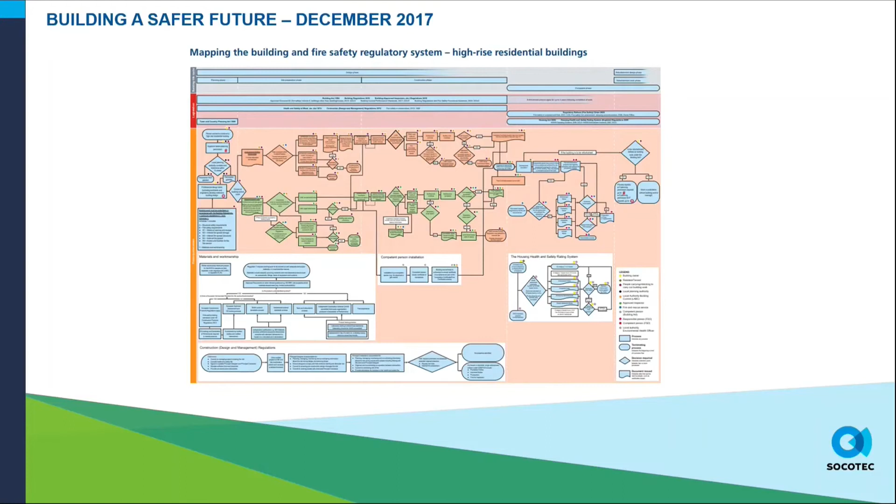And so this actually made it really difficult for buildings to comply and for people within the industry to understand all the aspects of industry and building safety, so that they could build buildings and understand their part in the construction process, and the effect that their work might have on other aspects of compliance for the building.

And so what Dame Judith and her team wanted to try and do was trying to simplify that process. Again, not expecting you to look at this - these are documents that are within the Building a Safer Future report.

But to simplify that process so that you actually went through stages. We've probably all heard about the gateway stages that are being proposed, and this was the plan for the legislation and for the proposals for industry, so that we simplified that process, went through the stages of design and construction and occupation of the building, and people could understand the process and the impact that their part of the works would have on the construction of a building and the safety of a building.

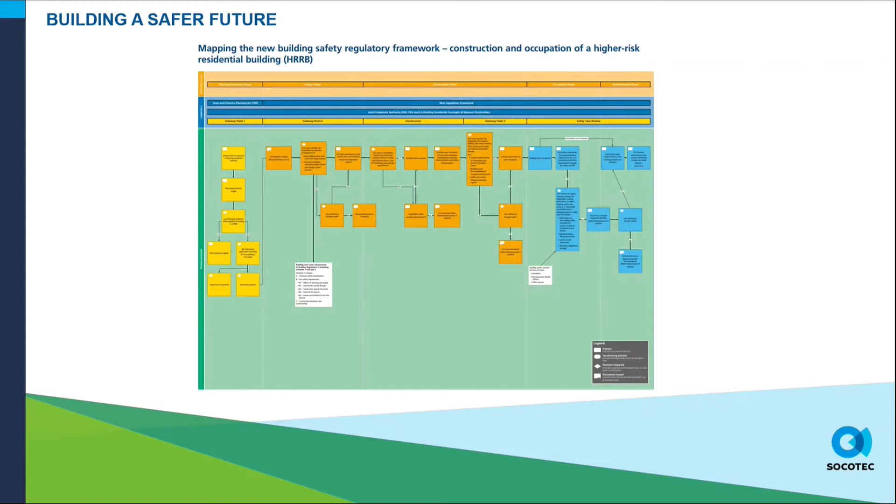And this is also going to look at buildings going into the future in occupation as well, rather than just during the design and construction process. So again, trying to simplify the process.

Within the Building Safety Act, the idea was that there would be a new building safety regulator. The Health and Safety Executive have been asked to become the building safety regulator, and Peter Baker has been appointed as the Chief Inspector of Buildings within the Health and Safety Executive.

With the Building Safety Act receiving royal assent and becoming the Act of 2022, that is now enshrined in legislation, the Building Safety Regulator. Although the Health and Safety Executive had been doing a lot of work in the meantime while the bill was running through Parliament, they were really acting in shadow form. But now the Act has been given royal assent, the Building Safety Regulator has come into being and can progress with their plans for the building safety culture.

At the heart of the reforms, the Building Safety Regulator is going to operate in England and will have three main functions, which we can see on this slide: overseeing the safety and performance of buildings, helping and encouraging the built environment industry and building control professionals to improve their competence, and leading implementation of the new regulatory framework for high-rise buildings.

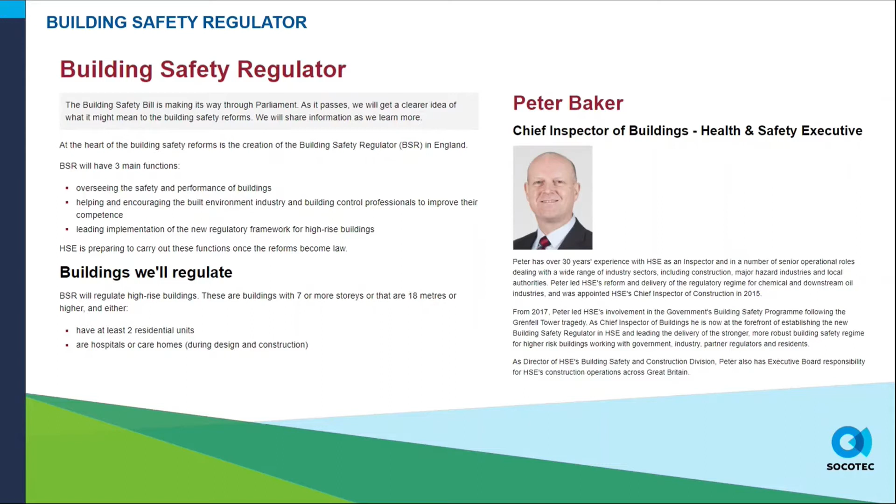At the bottom there about what the Building Safety Regulator will actually regulate, we are defining high-rise buildings or high-risk buildings for the Building Safety Regulator. These are likely to be buildings with 7 or more storeys or that are more than 18 metres high, and have either 2 residential units, or a hospital or a care home. We're going to define those and have a look at that a little bit more as we run through the presentation.

The second report I showed on my first slide was about setting the bar, a new competence regime and routine for the construction industry. Part of the function and responsibilities of the Building Safety Regulator was to set up an industry competence committee, and this has been in interim format running alongside while the Building Safety Bill has been running through Parliament. This will become the Industry Competence Committee after it has been formally appointed. John Vanstone is the chair of the Industry Competence Committee, and it reports back to the Competence Steering Group, which is chaired by Dame Judith Hackitt.

You can see here that the changes to the competence regime are going to cover the whole of the construction industry. So we're not just looking at building regulations and the building control profession in this now. We are looking at everybody.

12 working groups have been created to look at the various players within the construction industry and the built environment. So we are covering engineers, installers, fire engineers, fire risk assessors, fire safety enforcement officers, and building safety professionals - that is the building control body. Actually, for the Industry Competence Committee, they're not doing the review for the building standards professionals; that's being carried out by the Building Safety Regulator direct. Then we run through building designers, building safety managers, site supervisors, project managers, procurement professionals, and construction products competence.

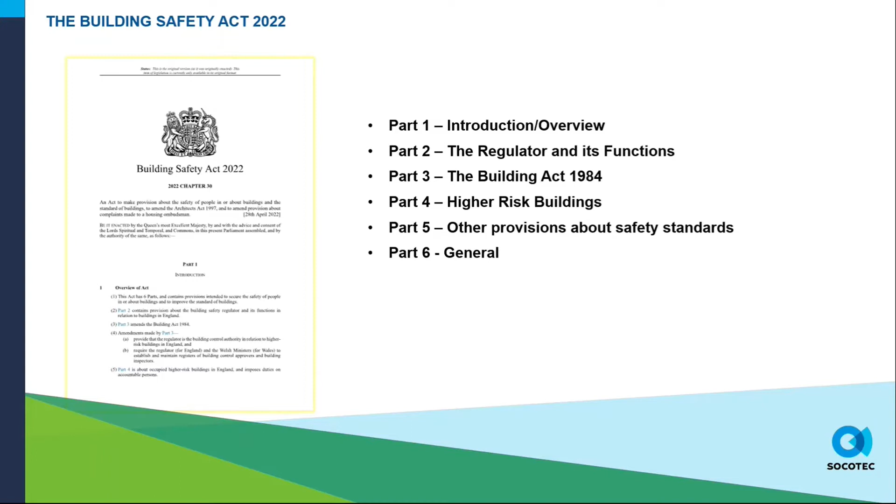Part 5 is some other provisions about safety standards, and Part 6 has some general provisions in terms of interpretation and things like that. So we'll start to have a look at these parts in a little bit more detail. Part 1 is just really the introduction, telling us what we've got in the Building Safety Act.

Part 2 contains provisions about the Building Safety Regulator. It's worth noting that this applies to buildings in England in terms of the Building Safety Regulator and its functions. Part 3 amends the Building Act, and amendments made by Part 3 provide that the regulator is the Building Control Authority in England for higher risk buildings, and require the regulator and the Welsh ministers to establish and maintain registers of building control approvers.

We'll have a look at some of this in more detail later in the presentation. But it's worth noting that the Building Safety Act has introduced the Building Safety Regulator and given it functions, which will act only within England. But it does give powers to the Welsh ministers to make regulations with similar effects within Wales. For those working across England and Wales, there will be a slightly different timetable for regulations, and we'll need to keep an eye out for regulations made via the Welsh Assembly by the Welsh ministers for buildings in Wales.

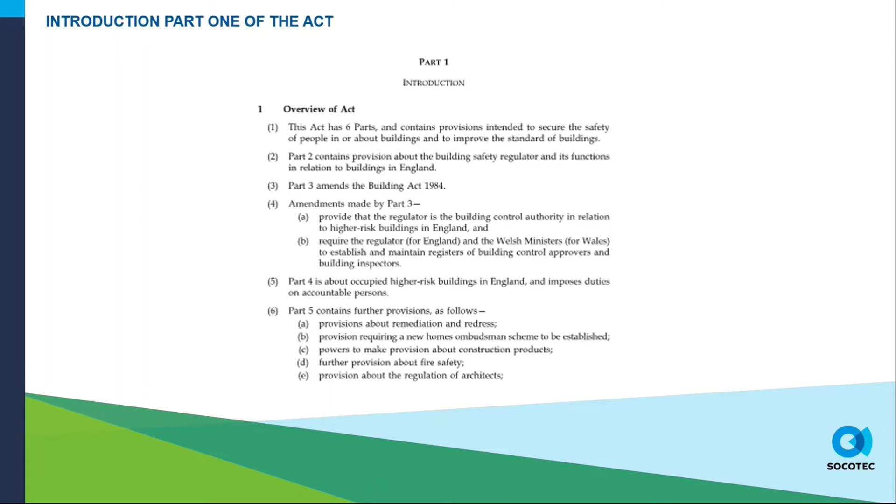So we'll start to have a look at those parts in a little bit more detail. Part 2 of the Act introduces the regulator and its functions.

The regulator has all of these duties and functions to be carried out. It has the duty to facilitate building safety, in relation to those higher risk buildings. It also has a duty to keep safety and standard of buildings under review throughout the construction industry, not just related to higher risk buildings. So the safety and standard of buildings is across the board, covering all buildings in our built environment.

The Building Safety Regulator has got a duty to facilitate improvement in the competency of industry and building inspectors. When we look at the Industry Competence Committee, we can see the breadth of that competence they're going to be looking at, across the whole of industry, demonstrating competence for carrying out works on different types of buildings.

There's probably been a lot of talk in the press about registering building inspectors within the building control community. We're very well aware that the Building Safety Regulator is going to be registering individual building inspectors, and also registering approved inspectors, who will become known as building control approvers.

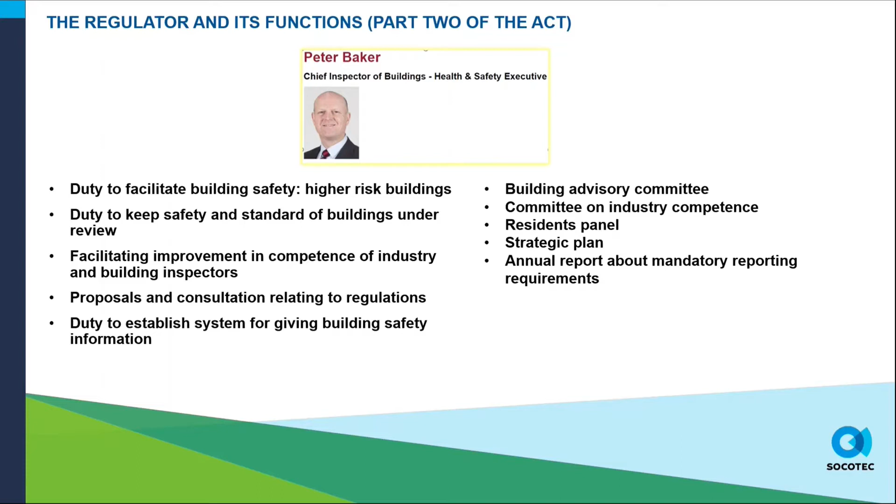So as you can see, the Building Safety Regulator, it's not just about higher risk buildings, it's about industry competence and the safety of the construction industry as a whole, and the safety of the built environment as a whole as well.

Part 3 of the Building Safety Act. This is an extensive part which extends to something like about 58 pages of legislation, and this is making amendments to the Building Act 1984.

This has 3 main areas where it makes amendments: in relation to building control authorities and the building regulations; about building control approvers, currently known as approved inspectors, and building inspectors. Building inspectors are any individuals that work in building control, working for either approved inspectors, local authority, or in the future for the Building Safety Regulator.

And then there's some other miscellaneous provisions and general amendments that need to be made in terms of the Building Act, where we're looking at some various fees and charges, and some levies that might be made on building control approvals, so that funding can be made for the remediation works that are going on at the moment.

If we have a look at some of those amendments that might be made or that have been made to the Building Act, we're talking about building control authorities - the different building control authorities that can enforce building regulations. We've got an overarching higher risk building category within the Building Act, and that allows the Secretary of State to make regulations to define those higher risk buildings.

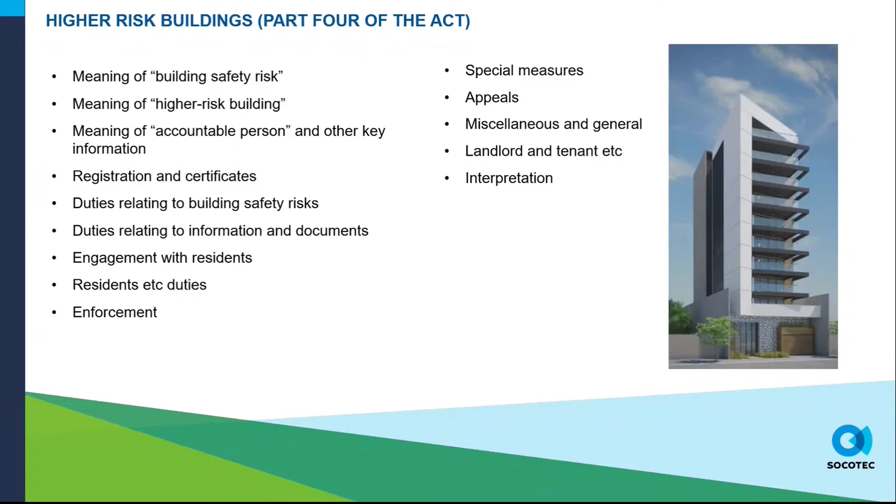There's legislation about enforcement, about special measures that the Building Safety Regulator can impose, and then we have information about appeals and landlord and tenant information as well. So that is all within Part 4 of the Act, which is applicable to buildings in occupation.

Part 5 is where we start to look at some other provisions that have been recommended and are going to be brought in, such as remediation and redress. What we're hearing at the moment is that Michael Gove is talking to the housing industry about making sure existing buildings that need remediation have the necessary remediation carried out, and also talking about the funding and how the funding will work for remediation of those existing buildings.

But this remediation process will also go into the future. Hopefully it wouldn't be necessary with a stricter regime, but if there are any necessary measures for remediation, then remediation is going to be covered within the Building Safety Act.

The Building Safety Act requires a new homes ombudsman to be created, and this is about to be created. I'm not sure it's actually in being at the moment, but the New Homes Quality Board have been asked to set up the New Homes Ombudsman as a body. This is where people who've got new homes - and again, this is applicable to all new homes, not just high-rise - can take complaints from residents or new home owners about the quality and standard of their homes.

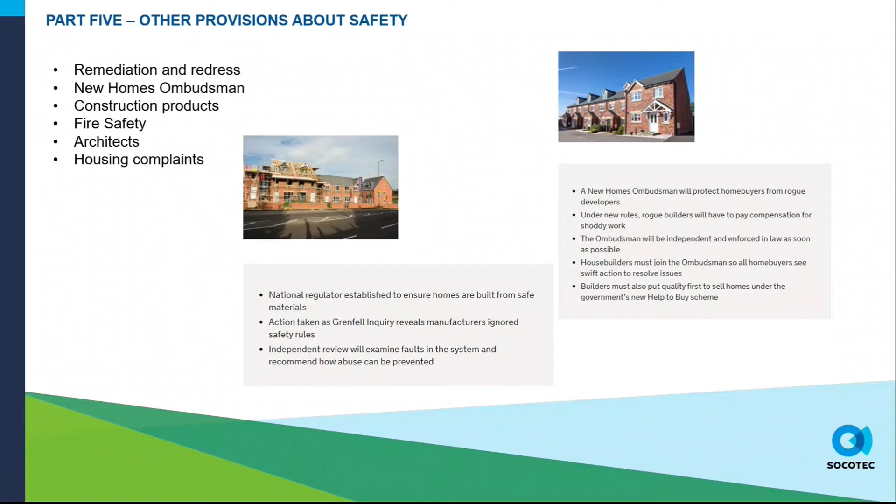So what are the next steps that we're going to look at?

The next steps are going to be consultations on regulations. There were some draft regulations on the website as the Building Safety Bill went through Parliament - those have now been taken off the website, as the next stage will be consultations on these. These will cover things like higher risk buildings descriptions, industry competence and duty holders. It will talk about architects and fees for services, and it will introduce some new regulations over that. It also talks about regulations for restricted activities and functions - we'll look at some of those over the next few slides.

Building safety fees regulations are going to be consulted on, and also the construction products regulations. Then we'll be looking at our higher risk buildings regulations and the higher risk buildings prescribed principles for management of building safety risks. The first of those consultations is what you see on the right-hand side there - the consultation on the higher risk buildings, descriptions and supplementary provisions regulations.

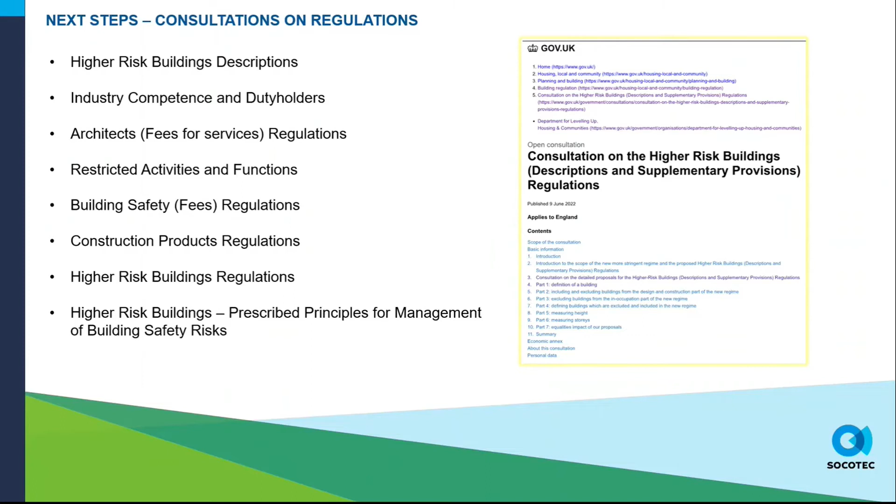So over the next 12 months, we're going to see an awful lot of consultations on new regulations coming through, so we need to keep an eye out for those.

And then just looking at the timeline before we start to look at some of the details of how those new regulations might impact our processes and procedures.

The Building Safety Act came in April 2022. By April next year, the fire safety order changes are in—I think they might already be in now, but they've come in early. And then by April 2023, the Architects Registration Board powers are going to be increased about registering architects and about the competence, architects demonstrating competence to the Architects Registration Board.

And then by October next year, there's going to be the mandatory registration of building inspectors and building control approvers. We're going to introduce the Gateway 2 and Gateway 3 process, which is the plan approval and completion of construction prior to occupation. The mandatory registration of those higher risk buildings is going to come in by October.

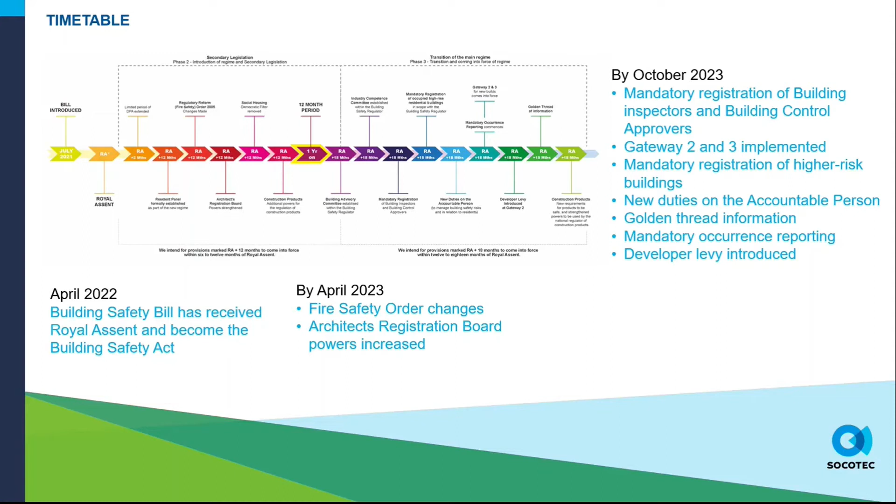And then there's going to be new duties on the accountable person, as we've discussed. That golden thread of information, our information about our building safety aspects, is going to be needed to be demonstrated for that registration process. The mandatory occurrence reporting system and the developer levy are all due to be introduced by October 2023. So you can see it's going to be a really busy 12 to 18 months in terms of legislation and new systems being set up.

So let's have a quick look through some of the implications that might have, looking at the design and construction process.

Design and construction stage, we're going to have the new building control authority of the building safety regulator for the higher risk buildings, and then the local authority are staying as the building control authority for all other buildings. And so as the authority, those are the bodies that can take enforcement action if building regulations are deemed to be breached.

For building control bodies, then the building safety regulator will become the building control body for higher risk buildings. So applications for higher risk building work will need to be submitted to the building safety regulator. And then other types of buildings that are not the higher risk buildings, similar systems as we have now for the local authority and building control approvers, as I say, currently approved inspectors, can carry out work as the building control body on other buildings other than higher risk buildings.

However, regulations are going to be made which will restrict activities and functions. And these are things like plan certificates, final certificates, inspections of work. And those building control bodies are going to need to have a recommendation from a registered building inspector in order to carry out those restricted functions.

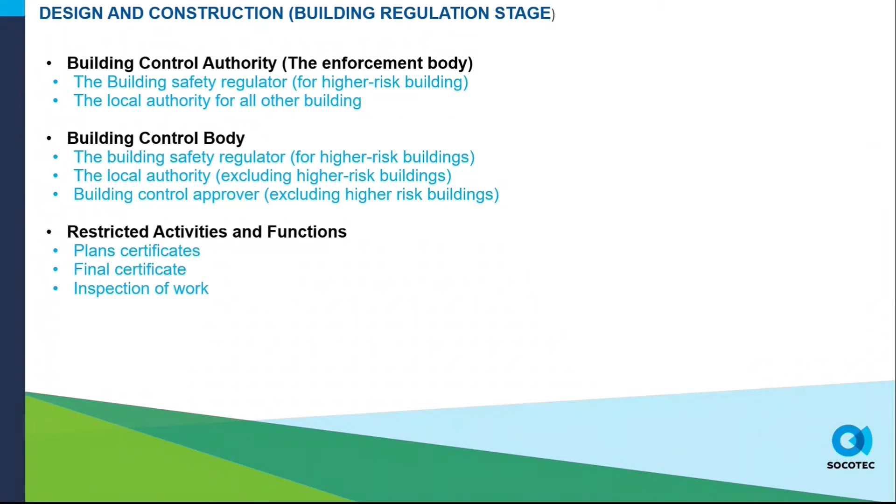So before issuing a plan certificate or a final certificate, building control bodies are going to need to have a recommendation from a registered individual building inspector that they can actually issue that certificate. And then inspections of work, again, need to be carried out for a building control body by a registered building inspector.

How might that look, and what might that look for us in construction phase? So the Building Act 1984 is still the overarching legislation. We've still got the Building Regulations 2010. We've still got the Building Approved Inspector Regulations 2010. But the building control bodies will either be the local authority, the building control approver, or the building safety regulator, and only the building safety regulator for the higher risk buildings.

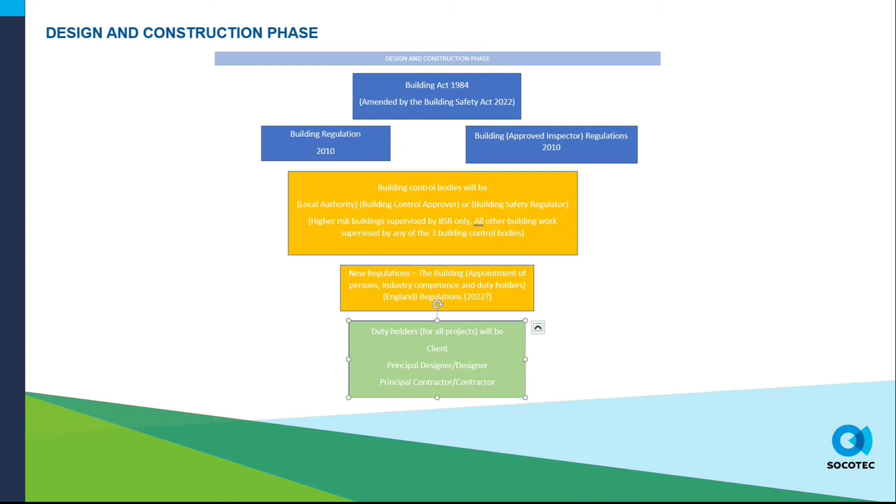There'll be new regulations about the appointment of persons and industry competence, and about duty holders. So there'll be a new set of regulations about duty holders, and you'll recognise these because they mirror the CDM regulation duty holders. Those are client, principal designer, and principal contractor.

So what do we have for those duty holders? It's going to be their duty to ensure that the work and the building complies with the building regulations. So the client will essentially have a duty to appoint principal designers and principal contractors who have the competence and capacity to carry out the design and construction in accordance with the building regulations.

The designer will have to confirm that their design is capable of being constructed to meet the building regulations. And likewise, the principal contractor will have to confirm, once they've completed the building, that they have built the building in accordance with the building regulations. But this is where you can see the similarity with the CDM regulations and how this system is going to actually affect everybody in the built environment, because there is going to be a domestic client.

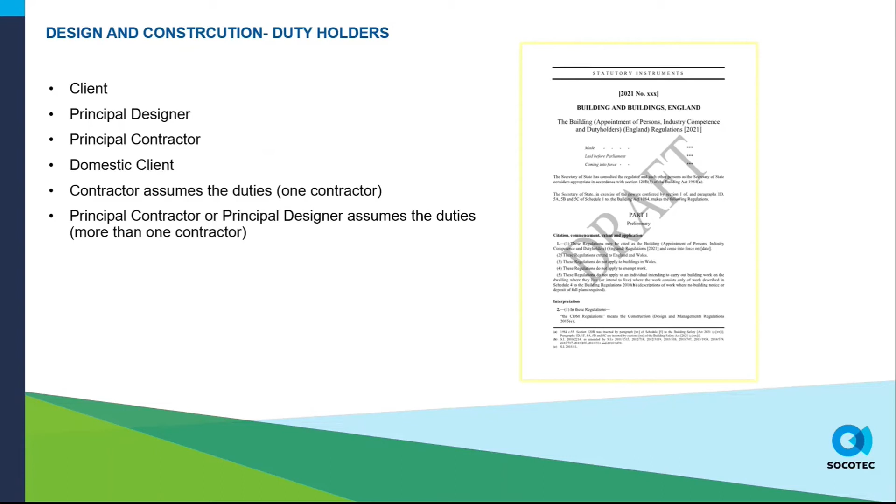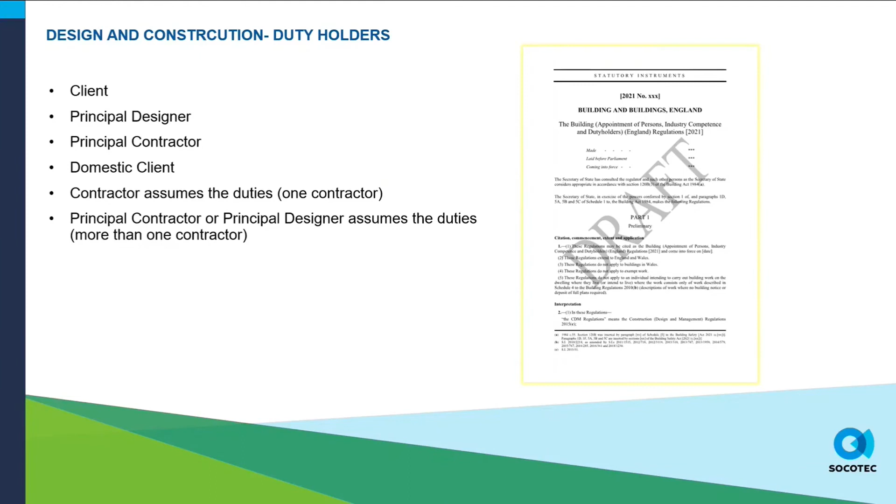Under the CDM regulations, the contractor will assume the duties of the domestic client if there's only one contractor. If there's more than one contractor or a designer, then the principal contractor or the principal designer will assume the duties for the domestic client. So you can see how that's mirroring the CDM regulations.

How might this look in terms of process? Take an application for work on a high-risk building. We've got planning gateway 1, which is already in place. A consultation occurs with the building safety regulator, and the building safety regulator gives advice and comments back to the planning authority.

Once planning approval has been granted, an application is made to the building safety regulator and the design is assessed. Duty holders need to submit the information to the building safety regulator, and their proposals are assessed by the building safety regulator, who must seek advice from a registered building inspector before they can give permission.

Once they're satisfied that the design is going to demonstrate compliance with the building regulations, they can give permission for that project to pass through gateway 2. That is the design stage of the building. It then moves into the construction stage.

The contractor is the principal contractor and the duty holder for demonstrating compliance with the building regulations and ensuring that the building complies. The building safety regulator will make inspections during this and will need to seek the advice of a registered building inspector again as this work proceeds.

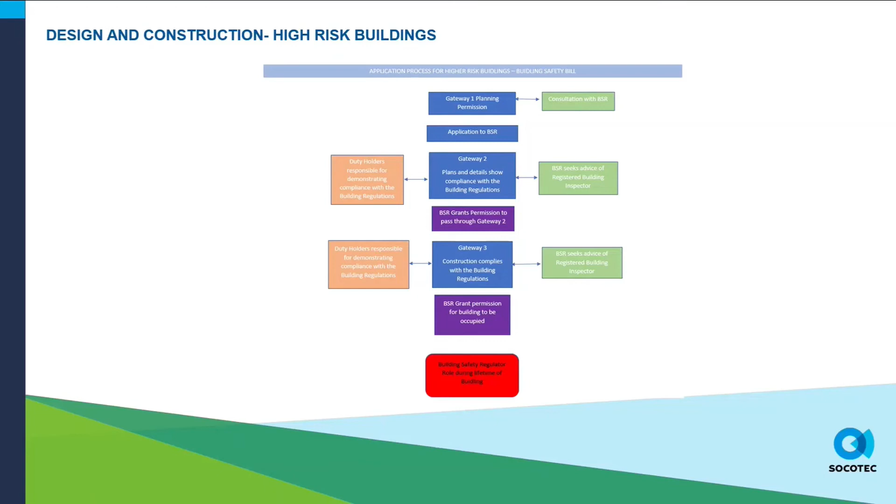The building then goes into the occupation phase, which the building safety regulator deals with under Part 4 of the Act, as we saw earlier.

For non-higher risk buildings, we've got similar processes to what we have now. You make an application for building control to a building control body, either a local authority or a building control approver, an approved inspector. Then we have buildings subject to the regulatory reform order or not. But the duty holder system remains: it is still the duty of the designers and the contractors to design and construct a building in accordance with the building regulations and confirm that is what they are doing.

The building control bodies, the local authority or the building control approver, again must seek advice from a registered building inspector, an individual person, before they can carry out those restricted functions of plan certificates, final certificates, and site inspections. So we can see that the new duty holder regime and the competence demonstration is going to affect the whole of the built environment.

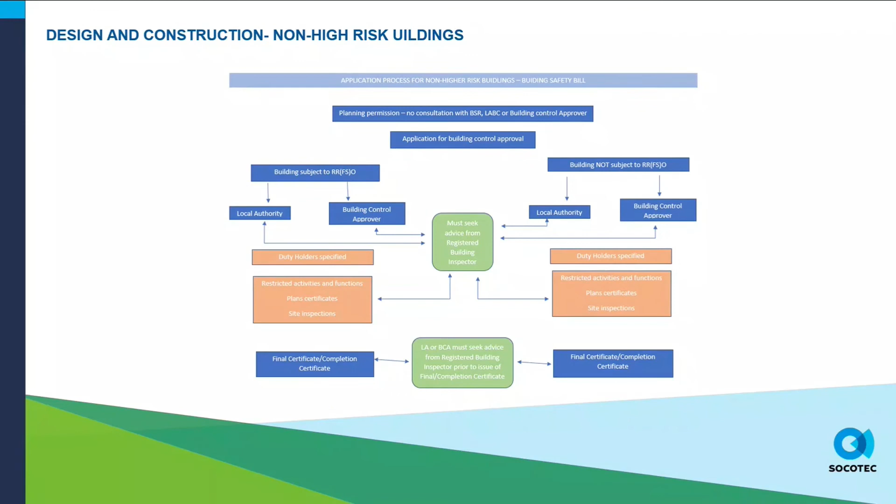If we have a quick look at occupation, the occupation phase is going to apply to those higher risk buildings and is going to be carried out by the building safety regulator. These are buildings 18 meters in height or 7 stories, containing at least 2 residential units. We're going to be monitoring the building safety risks in terms of spread of fire and structural safety. The accountable person is going to be a person with a legal estate in possession of the building, or having a relevant repairing obligation.

Higher risk buildings have got to be registered prior to occupation, as we've just seen. They will go through gateway 3, but you've got to register them with the building safety regulator before you're allowed to occupy that building.

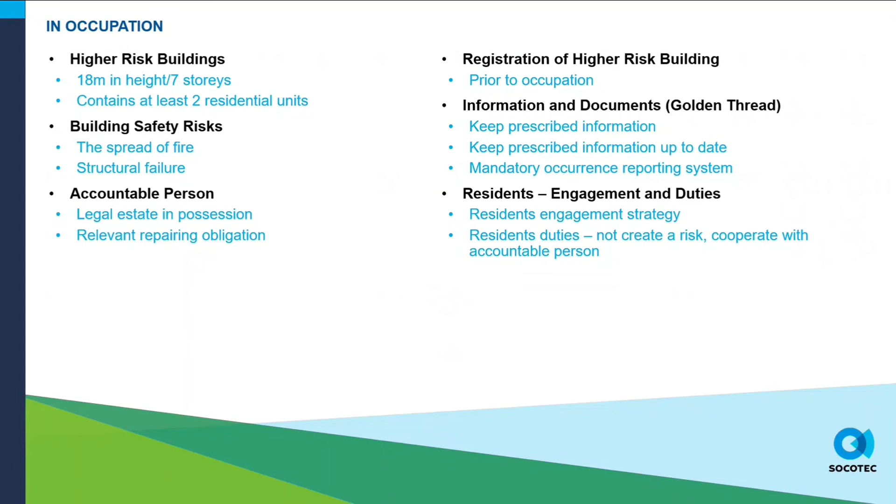We've talked about the golden thread and about the information and documents. Prescribed information is going to be required to be maintained, and prescribed information about safety risks is going to be required to be kept up to date. There's also going to be a mandatory occurrence reporting system to report on any building safety risks that develop.

As we mentioned, residents are going to have a greater voice, and so building owners are going to have to introduce a residents engagement strategy so that they can demonstrate that they're engaging with residents. But as I mentioned previously, residents also have duties not to create a risk and also have a duty to cooperate with the accountable person.

So what might that look like as a sort of flow chart? We've got the Building Safety Act now, which is covering the in-occupation phase. We've got new regulations that will be drafted to introduce a system of higher risk buildings in occupation and registration with the building safety regulator. So the accountable person must register their building before they're allowed to occupy. The accountable person will be a new duty holder that will have duties imposed on them via the legislation.

There's some draft guidance and indication from the Health and Safety Executive about what safety case reports might look like, and how we actually write those safety cases for demonstrating that our buildings are going to be safe in occupation. That document is already published, and there will be further updates as we develop guidance on what a safety case has to include.

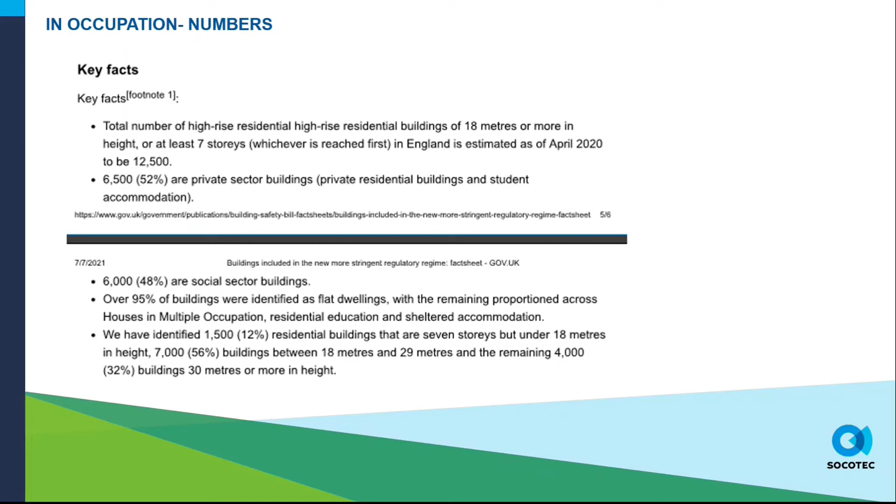Some numbers about the buildings we've got there show that it's quite a large piece of work ahead. Total number of high-rise residential buildings over 18 metres or more than 7 stories in England is estimated at 12,500. 6,500 are estimated in the private sector. We've got to get all of those existing buildings registered with the building safety regulator, so this is going to be an extensive task. All of those buildings are going to need safety cases written about them, and then applications from the accountable persons need to be made to the building safety regulator. So a big task ahead of us.

Some of the other provisions that we've got are about remediation of defects, relevant defects, so what's causing a building safety risk. And then some of the relevant buildings, they're now starting to talk about buildings with 2 dwellings at 11 metres high or 5 stories in terms of these remediation processes. So that's a slightly different definition to the higher risk buildings that we've seen previously.

Some of the building industry schemes about securing the safety of people and improving building standards. So we're going to be looking at some schemes to improve building standards and ensure that our buildings are safe, so that people in the buildings are going to be safe in occupation.

A new Homes Ombudsman, we've mentioned about this being developed, and this is due to come into being anytime now, actually, but during this year. And it's going to be open to all developers, and then qualifying complaints - there's going to be a list of complaints that can be made, and complaints about members of the Ombudsman process.

And then there's legislation about new build home warranties. Developers must provide a purchaser with a warranty, and the Secretary of State may actually impose some requirements about the warranty system, and that will be via subsequent regulations that will be made.

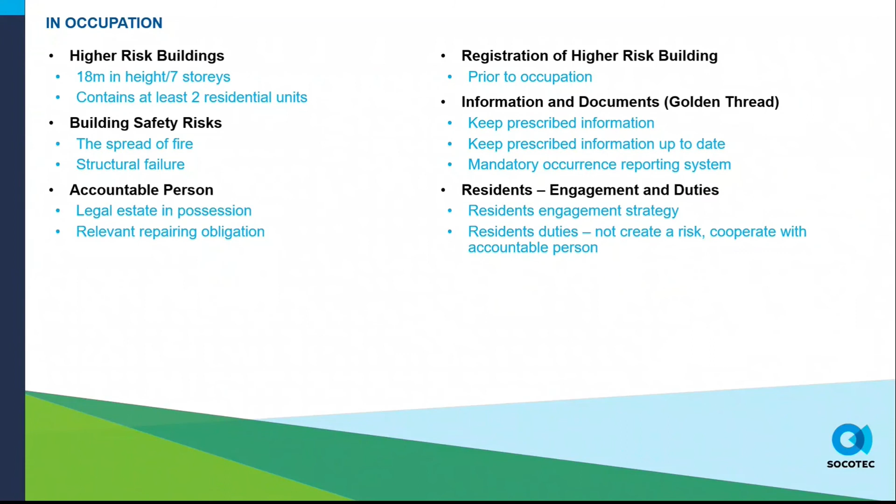As we mentioned about residents, they're going to have a greater voice. And so building owners are going to have to introduce a residents engagement strategy so that they can demonstrate that they're engaging with residents. But as I mentioned previously, residents also have duties not to create a risk and also have a duty to cooperate with the accountable person.

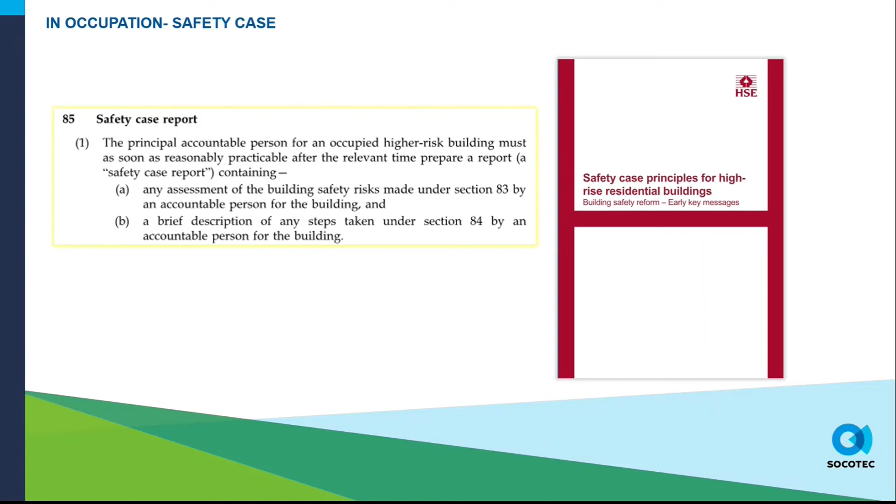Some numbers about the buildings that we've got there to show that it's quite a large piece of work. Total number of high-rise residential buildings over 18 metres or more than 7 stories in England is estimated at 12,500. 6,500 are estimated in the private sector. And so we've got to get all of those existing buildings registered with the building safety regulator. So you can see that this is going to be an extensive task. All of those buildings are going to need safety cases written about them, and then applications from the accountable persons need to be made to the building safety regulator. So a big task ahead of us.

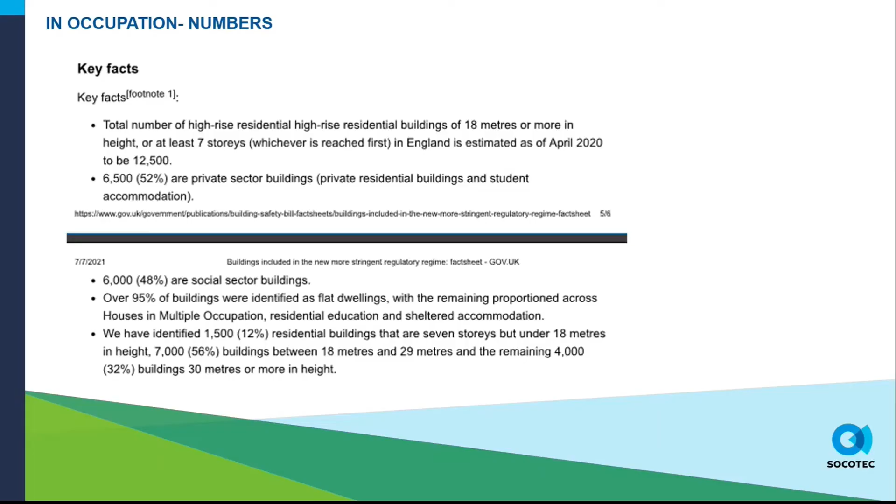Some of the other provisions that we've got about remediation of defects, relevant defects, so what's causing a building safety risk. And then some of the relevant buildings - they're now starting to talk about buildings with 2 dwellings at 11 metres high or 5 stories in terms of these remediation processes. So that's a slightly different definition to the higher risk buildings that we've seen previously.

Some of the building industry schemes about securing the safety of people and improving building standards. So we're going to be looking at some schemes to improve building standards and ensure that our buildings are safe so that people in the buildings are going to be safe in occupation.

A new Homes Ombudsman, we've mentioned about this being developed, and this is due to come into being anytime now, during this year. And it's going to be open to all developers, and then qualifying complaints - there's going to be a list of complaints that can be made about members of the Ombudsman process.

And then there's legislation about new build home warranties. Developers must provide a purchaser with a warranty, and the Secretary of State may actually impose some requirements about the warranty system, and that will be via subsequent regulations that will be made.

We've got information about construction products, about safety of those products, and about liabilities and costs should those products prove not to be safe in the way that they're being used. Amendments to the fire safety order that we've mentioned already, and then amendments to the architects legislation.